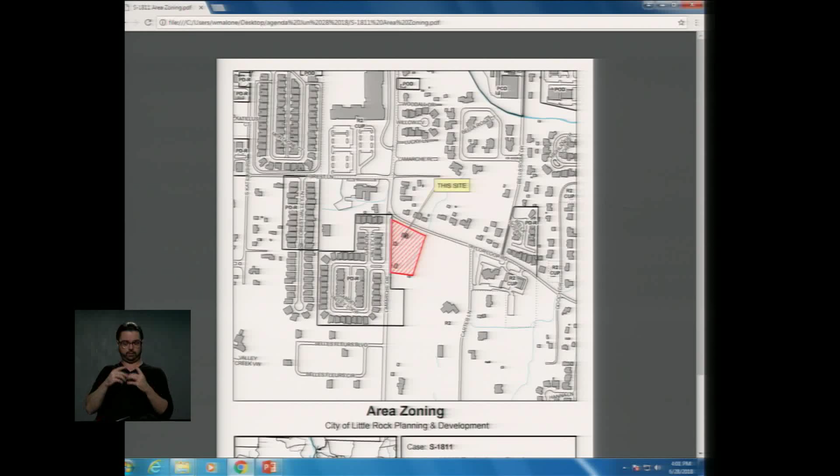Items for consent deferral. Item A, file number S-1811, LaMarche Village Preliminary Plat, located at 16307 Taylor Loop Road. Staff recommends deferral of this item to the August 9, 2018 hearing. The applicant and staff have been unable to resolve staff's concerns related to the driveway placement and the access and circulation on the site.

Item number C, file number Z-9320, Gramercy Park at Midtown, short form PDR, located at 6400 West Markham Street, or the northwest corner of West Markham and McKinley Streets. The applicant submitted a request dated June 4, 2018, requesting deferral of this item to the August 9, 2018 public hearing. Staff is supportive of the deferral request.

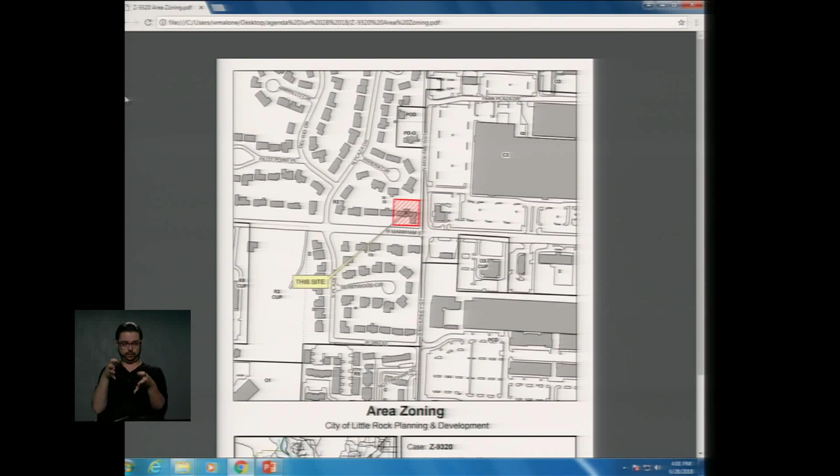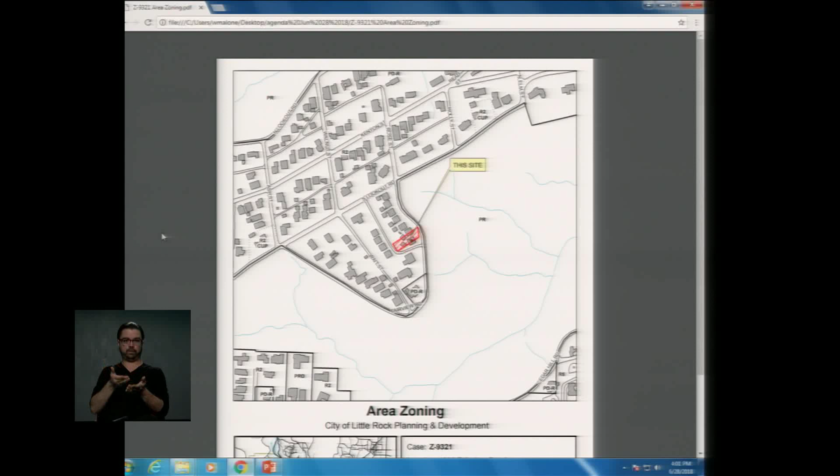Item number D, file number Z-9321, Calhoun short form PDR, located at 4208 Fairview Road. The applicant failed to provide proper notice to the property owners as required by the Planning Commission bylaws. Staff recommends deferral of this item to the August 9, 2018 public hearing.

Item number 1, file number S-1809-A, Breeding Addition Preliminary Final Plat, located at 7718 Henderson Road. Staff recommends this item be deferred to the August 9, 2018 Planning Commission hearing date to allow the applicant to secure approval from the Arkansas Department of Health that the existing septic system is in compliance with all health department requirements.

Item number 5, file number S-1819, 65th Street Center Subdivision Site Plan Review, located at 5303 West 65th Street. The applicant has not provided staff with the site plan to address their concerns related to access and circulation on the site once the fuel island and canopy are added. Staff recommends deferral of this item to the August 9, 2018 public hearing.

Item number 8, file number Z-1002-A, Sonny's Car Wash, short form PCD, located at 7706 Cantrell Road. The applicant failed to provide proper notice to the property owners as required by the Commission's bylaws. Staff recommends deferral of this item to the August 9, 2018 public hearing to allow the applicant to provide proper notice.

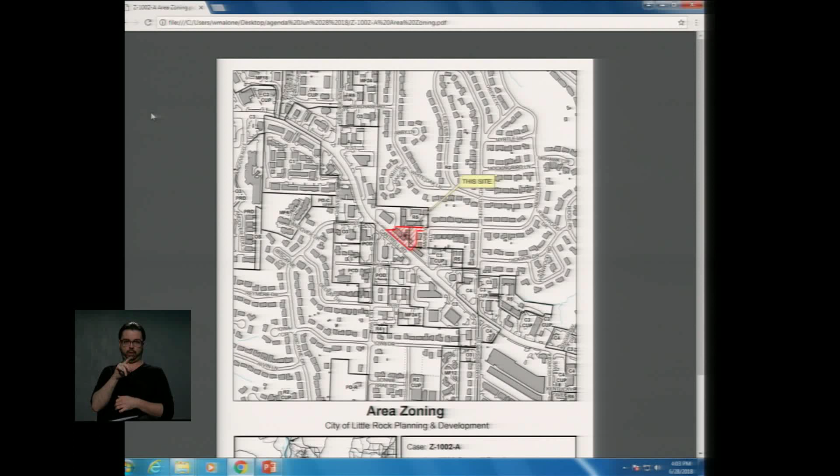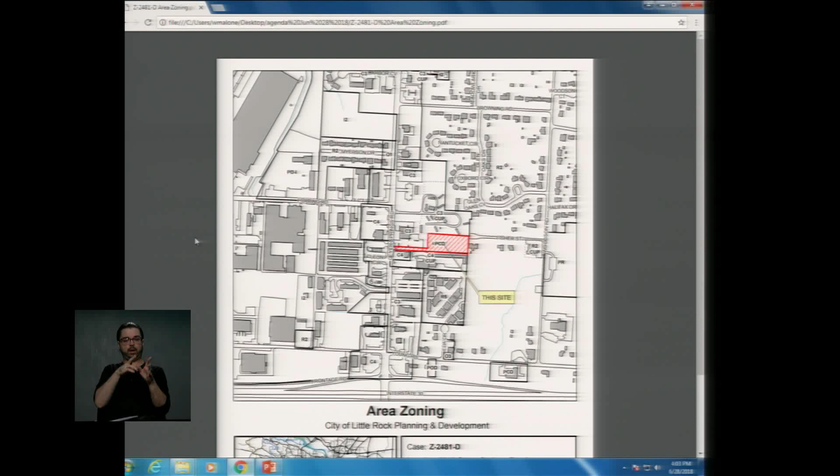Item number 9, file number Z-2481-D, Geyer Springs Business Center, short form PCD, located behind 7315 Geyer Springs Road. The applicant failed to respond to comments raised at the June 6, 2018 Subdivision Committee meeting. Staff recommends deferral of this item to the August 9, 2018 public hearing.

Item number 15, file number Z-8098-A, Palmer Revised Short Form PDR, located at 2919 through 2921 Lee Street and 1312 Kavanaugh Boulevard. The applicant submitted a request dated June 27, 2018, requesting deferral of this item to the August 9, 2018 public hearing. The applicant states additional time is needed to review staff's recommendation and potentially meet with the neighbors. The deferral request will require a waiver of the Commission's bylaws with regard to the late deferral request. Staff is supportive of the deferral request.

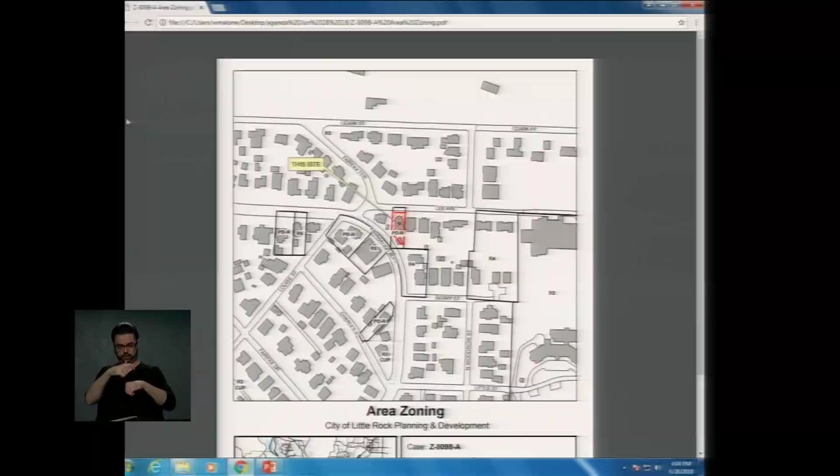Item number 23, file number A-332, Kanis Road Deltic Potlatch Annexation. Staff needs additional time to review and consider this request. Staff recommends deferral of this item to the July 12, 2018 public hearing.

Items for consent approval. Item 2, file number S-1816, Valerie Place Subdivision Preliminary Plat, located at 14,000 to 14,617 Kanis Road. Staff recommends approval of the request, subject to compliance with the comments and conditions as outlined in paragraphs D, E, and F of the agenda staff report. Staff recommends approval of the following variance requests.

A variance from section 31-256 and 36-254 to allow the front building setback to be reduced to 20 feet, and a variance from section 31-232 to allow the creation of lots with a lot width less than the 60-foot typical required per the R2 single-family zoning district, to allow 5-foot side yard setbacks on all lots within the subdivision, and to allow lots 16, 29, 33, 36, 45, and 52 to be developed with a lot area less than 7,000 square feet. Staff recommends approval of the variance request from the land alteration ordinance to allow grading of the lots with the installation of infrastructure and streets for the subdivision.

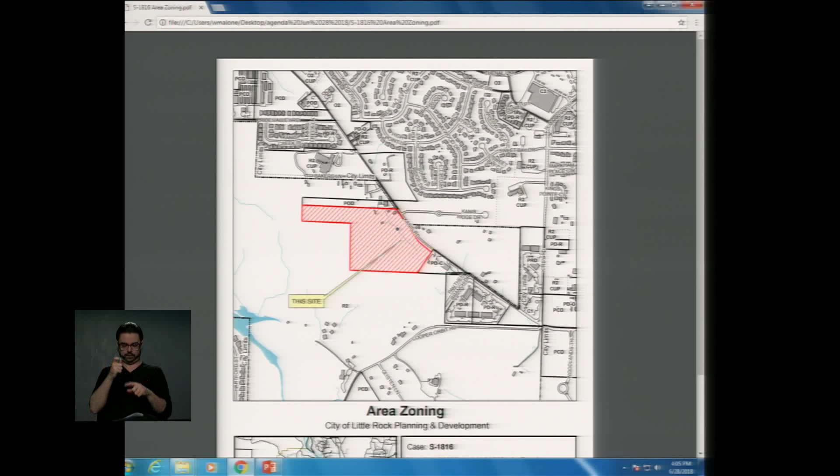Item number 3, file number S-1817, Herndon, Lot 1, preliminary final plat, located at 9201 Herndon Road. Staff recommends approval of the request, subject to compliance with the comments and conditions as outlined in paragraphs D, E, and F of the agenda staff report.

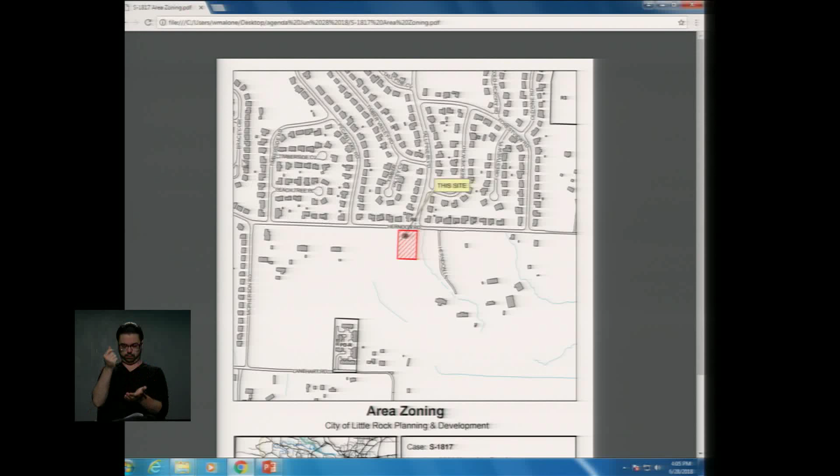Item number 6, file number S-1820, Lumber 1, subdivision site plan review, located at 11610 Vimy Ridge Road. Staff recommends approval of the request, subject to compliance with the comments and conditions as outlined in paragraphs D, E, and F of the agenda staff report.

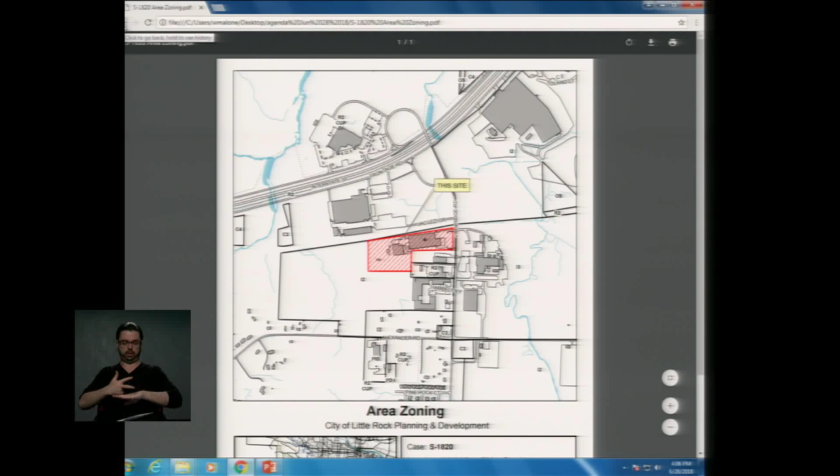Staff recommends approval of the waiver request of the screening of the outdoor storage areas along the northern, southern, and western perimeters. Staff recommends the parking lot be redesigned and concrete removed to allow for the parking to be located outside the right-of-way and the sidewalk to be located away from the back of the curb.

Item number 7, file number Z-4470-K, lots 3 and 4, Chenal Park Center, zoning site plan review, located at 15112 and 15104 Chenal Parkway. The applicant has agreed to limit the stacking of the easternmost drive-through on lot 4 to 6 cars and to the channelization of the southeast driveway and entrance. Staff is now in support of the request.

Staff recommends approval of the request, subject to compliance with the comments and conditions as outlined in paragraphs D, E, and F of the agenda staff report. Item number 10, file number

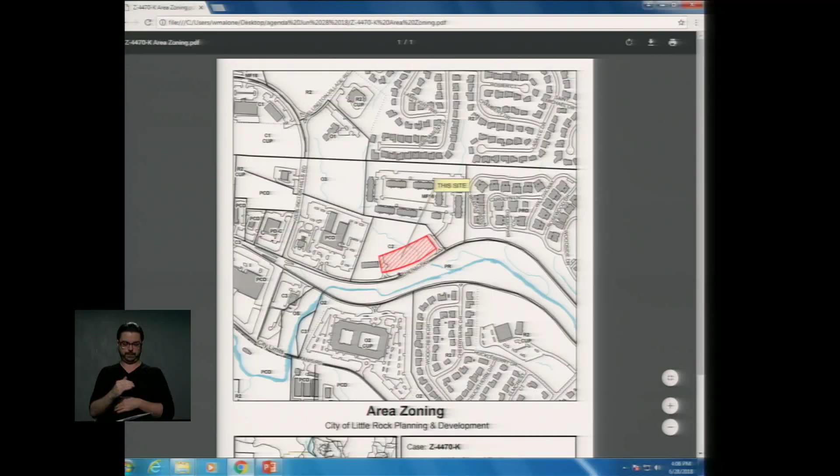Z-3371-CCC, lots 7 through 9, Colonel Glenn Tech Center, long form PCD, located on the northeast corner of South Bowman Road and Colonel Glenn Plaza Drive. The applicant has amended the request to include additional commitments with an adjacent property owner regarding building heights, site lighting, grading, and signage. This commitment will become a part of the approved site plan and the overall development plan.

Staff recommends approval of the request, subject to compliance with the comments and conditions as outlined in paragraphs D, E, and F of the agenda staff report. Staff recommends approval of the variance request from the land alteration ordinance to allow continued grading of the site. Staff recommends approval of the variance request from the Boundary Street and Subdivision Ordinance to allow the driveway located on Lot 9 nearer the property line than typical ordinance standard.

Staff recommends the street improvements adjacent to Lot 7 along South Bowman Road be completed with the development of Lot 8 or with the development of the second lot of this proposed PCD development.

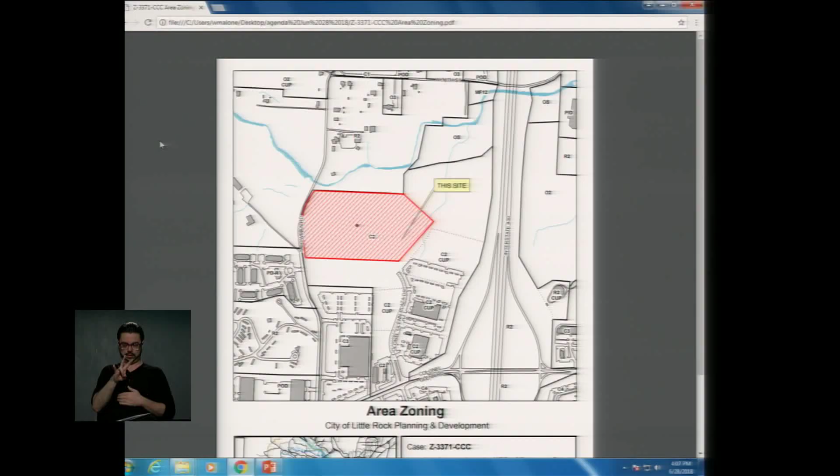Item number 11, file number Z-3371-DDD, Lumber 1, long form PCD, located at 10800 Colonel Glenn Road. The applicant has removed from the request the allowance of the drive along Colonel Glenn Road located between lots 3 and 4. Based on this revision, staff is now in support of the request.

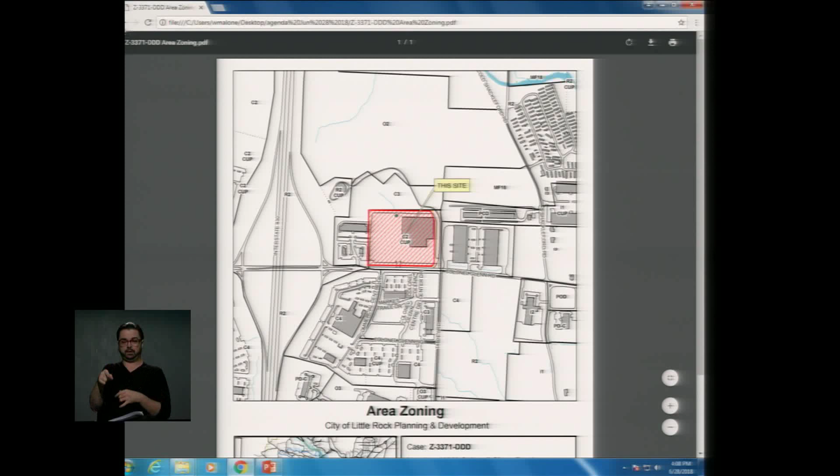Staff recommends approval of the request, subject to compliance with the comments and conditions as outlined in paragraphs D, E, and F of the agenda staff report. Staff recommends the drive aisles be reduced on all the lots to allow for additional street buffering area along Colonel Glenn Road. The existing parking lot curb is to be maintained, allowing the street buffer to be maintained as currently exists. Item number 12, file number

Z-4336-TT, Metropolitan Housing Authority, Powell Towers, short form POD, located at 1010 Wolf Street. Staff recommends approval of the request, subject to compliance with the comments and conditions as outlined in paragraphs D, E, and F of the agenda staff report.

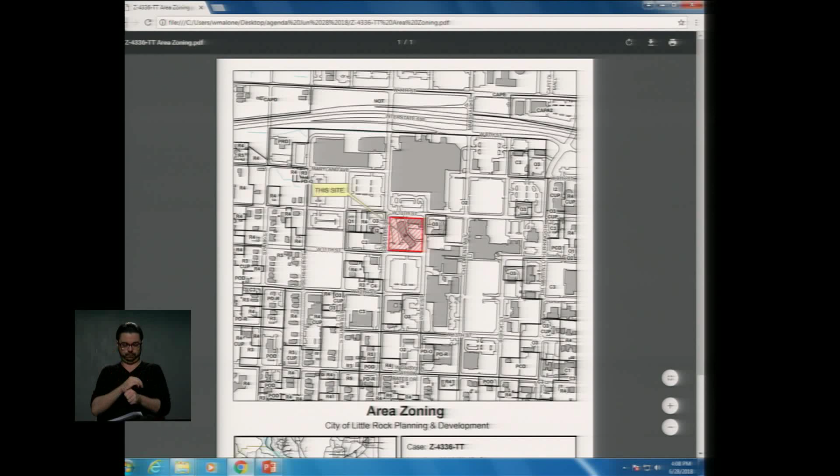Item number 13, file number Z-4946-A, Showroom Ready, short form PID, located at 10118 Colonel Glenn Road. Staff recommends approval of the request, subject to compliance with the following conditions.

Compliance with the comments and conditions as outlined in paragraphs D, E, and F of the agenda staff report. There is to be no outside storage of parts, equipment, or materials. All work must take place within the enclosed building. No inoperable vehicles are to remain on the site for longer than 7 days, and the use is limited to this business and the use as described in the applicant's proposal in paragraph A and the analysis in paragraph I.

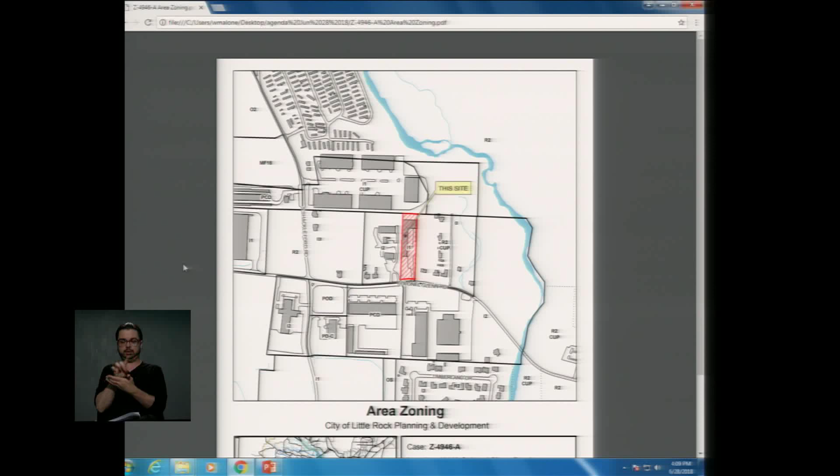Item number 14, file number Z-7899-A, Brett Short Form PCD, located at 10111 Chico Road. Staff recommends approval of the request, subject to compliance with the comments and conditions as outlined in paragraphs D, E, and F of the agenda staff report.

Item number 16, file number Z-8235-B, the Village at Bellaterra, long form PCD and PDR, located on the northeast corner of Stagecoach Road and Alexander Road. The applicant has amended the request and is now proposing Bellaterra Lane, Bellaterra Cove, and Bellaterra Boulevard within the residential portion of the development as private streets. Staff is now supportive of the applicant's request. Staff recommends approval of the request, subject to compliance with the comments and conditions as outlined in paragraphs D, E, and F of the agenda staff report.

Staff recommends approval of the variance request from the land alteration ordinance to allow grading of the site with the development of the first phase. And staff recommends approval of the applicant's request for a deferral of the boundary street improvements for the proposed Crystal Valley lateral extension located along the western boundary of the proposed development.

Item number 20, file number Z-3117-E, 7415 Colonel Glenn Road, revised short form PCD, located at 7415 Colonel Glenn Road. Staff recommends approval of the request, subject to compliance with the comments and conditions as outlined in paragraphs D, E, and F of the agenda staff report.

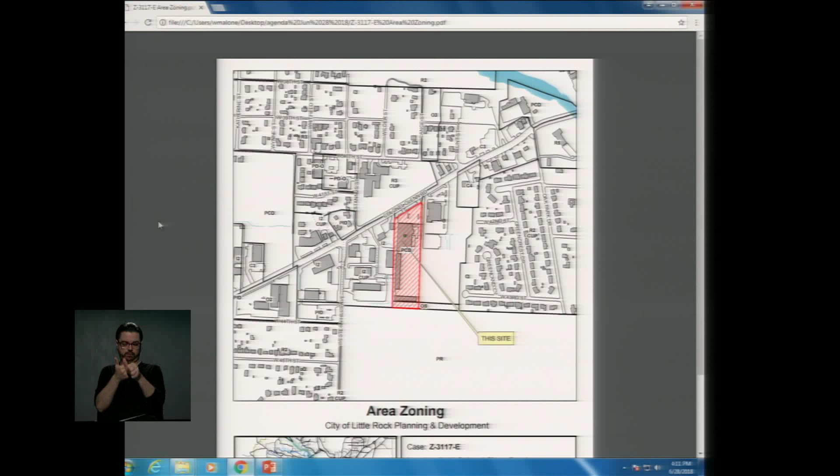Item number 21, file number Z-5365-F, Geyer Springs First Baptist Church, short form PDO, located at 12400 I-30. Staff recommends approval of the request, subject to compliance with the comments and conditions as outlined in paragraphs D, E, and F of the agenda staff report.

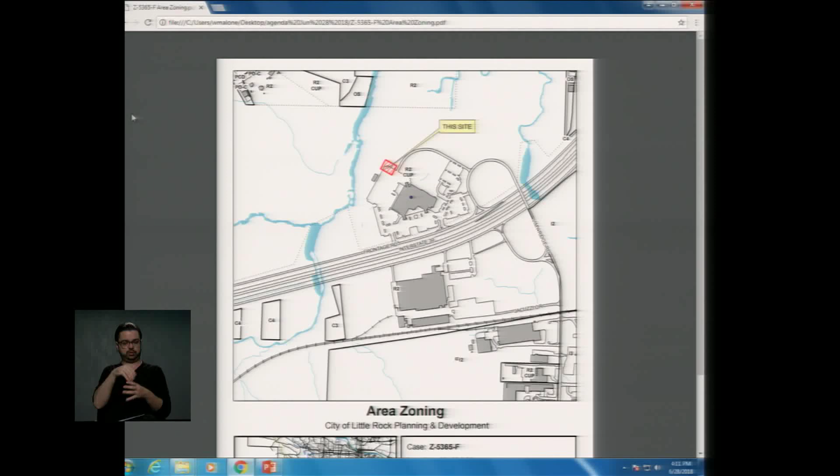And item number 22, file number Z-8292-B, the House of Vision, short form POD revocation, located at 1921 Wright Avenue. Staff recommends the current POD zoning classification be revoked and the previously held R4 two-family district zoning be restored. And that concludes the consent agenda.

Thank you, Ms. James. Before we get on with the motion, I just am about to get a card on item number 16 on Bellaterra. Is that correct? Someone has questions about it. Just walked in. So we'll pull 16 off.

Does anyone have to recuse themselves for any of the items that are on the consent agenda before we go on with motions? Mr. Chairman, I'd have to recuse on consent approval, but I have 3 items on there. Thank you, Commissioner Leahy.

Do I hear a motion on the bylaw waiver? Mr. Chairman, there is a bylaw waiver needed on item number 15, and I move that that be granted. Thank you, I'll second. We have a motion to waive the bylaws on item 15 for deferral to August the 9th. Do I hear a second on it? So those approve of the waiver and the deferral, raise your hand. Those who opposed? Okay, now for the consent agenda.

Item number B, file number Z-9284, Sticks Bar and Grill, which is actually now an event center, short form PCD, located at 3910 Asher Avenue. This item was deferred from the Commission's April 5th, 2018 public hearing to allow the applicant additional time to secure a parking agreement with the church, which owns a large portion of the paved area in front of the building. The item was deferred from the Commission's May 17th public hearing because the applicant was not present to represent their case. Since the staff write-up, the applicant has provided staff with the parking agreement with the church.

Staff continues to have concerns with both the lack of parking to serve the site and the placement of an event center at this location. There are single-family homes located immediately to the north of the site, and a portion of the applicant's proposed parking is located adjacent to the homes. Staff feels the site should be redeveloped to some type of retail use, which would not require the amount of parking required for an event center and would have hours with less impact on the nearby adjacent homes. Staff recommends denial of the request.

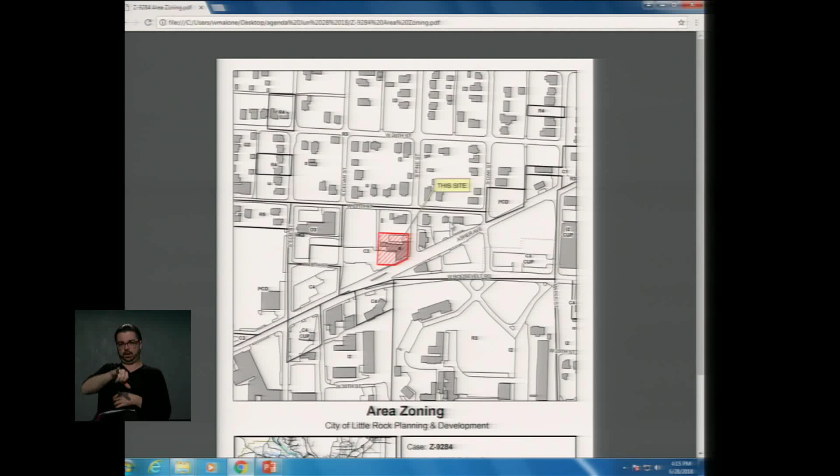Okay, is the applicant here? Yes. Would you like to speak to staff's concerns, anything about your application? Yes, sir.

What I was planning on doing about the parking against the residence is providing a private fence around that resident area, around the parking, so the parking or anything else wouldn't bother the resident behind the building. I hadn't had any complaints from the guy that stays directly behind the building.

In fact, he watches the building while I'm not there anyway. It's going to be kid friendly. I'm planning on hiring the Little Rock Police Department to patrol the area if I have a night event, and hire an armed security guard, private security, so they can also patrol during a day event and a night event.

I want the event center for little private birthday parties, or what I'm looking for is receptions, wedding receptions, stuff like that, and that's basically it. It's not going to be nothing else in there.

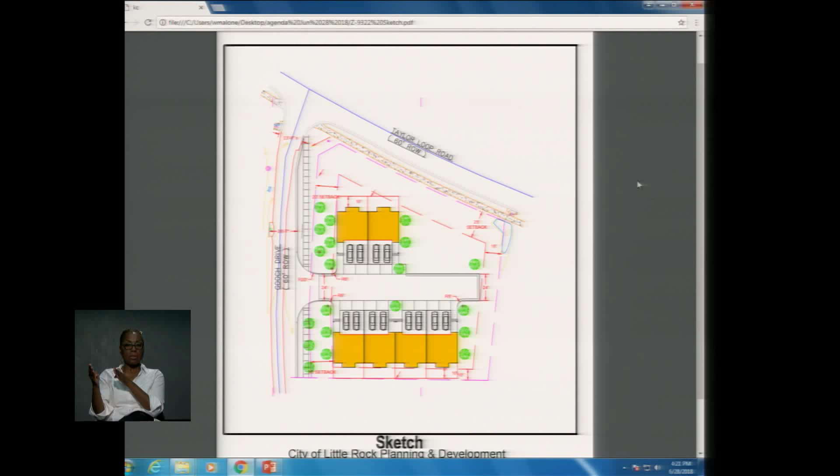The plan indicates a 10-foot building setback along the southern perimeter of the site, a 20-foot building setback along Gooch Drive, and a minimum setback along Taylor Loop of 25 feet. The maximum building setback along the eastern perimeter is 15 feet. The applicant has indicated there will not be a fence placed on the perimeter due to the flooding hazard of the site.

The applicant notes fences around the patio areas will be placed for each unit. Areas along the south property line will be 6 feet high. For the length of the 4 units, a 6-foot wood fence will also be placed around the patio areas of the homes along the northern portion of the site. The development is proposed in a single phase.

Public Works staff has worked with the applicant on the site drainage. The subject property is .9 acres in size, with the upstream drainage basin consisting of 422 acres. The applicant proposes to exceed the drainage requirements found in the Little Rock Stormwater Management and Drainage Manual, providing stormwater detention for a 25-year storm event, even though detention is not required since the property being developed contains less than 1 acre. The applicant also proposes to provide more stormwater storage volume on the site than the pre-development condition.

Appropriate landscaping in areas proposed to store stormwater will be placed, which will be tolerant of the temporary ponding conditions. Staff is supportive of the applicant's request.

The applicant is seeking approval of the rezoning to allow the development of 6 townhouses with a density of 6.66 units per acre, just over the density typically allowed per the future land use designation of residential low. Staff feels the development of the site as proposed is appropriate, and staff recommends approval of the request, subject to compliance with the comments and conditions outlined in paragraphs D, E, and F of the agenda staff report.

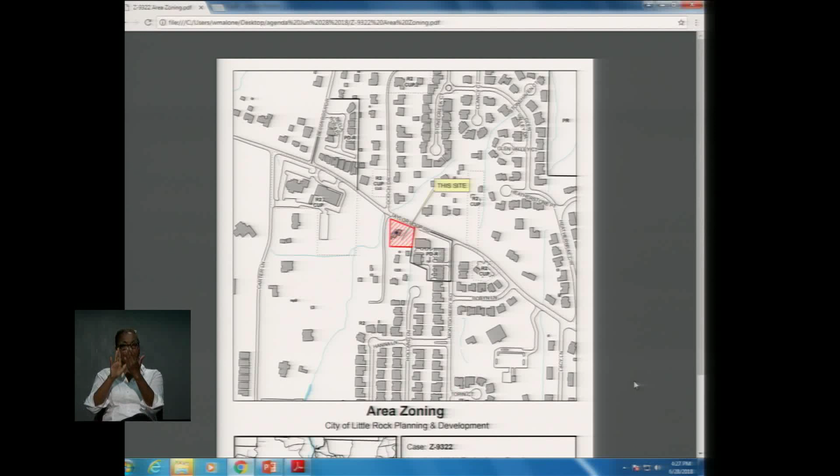I've had to buy flood insurance. I don't live in a floodplain, says my deed, but I have to buy flood insurance to protect my house. I'll be 79 next year. I don't want to have to buy flood insurance. I live in an area that was not to be that. So I'm asking you to consider what I have said to you, and what I have been faced with ever since Madison Valley. Thank you very much.

Thank you, Mrs. Nettles. Drainage seems to be coming up as an issue for developments out here. I think Public Works speaks to that. Anyone from Public Works want to speak to that? I'll let the applicant address that as well, but there's a general issue beyond this application too.

Well, that's a very broad topic, and we're talking about a lot of different things. Of course, tonight we're talking about just the 1 acre lot there.

The Nettles property would be the second house over from Gooch on the other side of the street. There is a very large drain that comes in and crosses right very close to the front yard of that house, including a little shop building further down on the creek. She has called us before, and she had water in her shop building.

Across the street, Madison Valley's some years old now. Maybe a couple of you remember when that one went in. It would be the subdivision to the south along Madison Road, and there is detention provided there. And it did meet the standard for the time.

Certainly, though, in an area that's prone to flooding, you get some large events. And I'd remind you that even in the best of designs, they're to have a design storm, and when that design storm's exceeded, the water's still coming. It doesn't guarantee under every event it'll never flood, but certainly it was built to a standard for the 25-year pre-development and post-development storms. And we do try to pay very close attention to that.

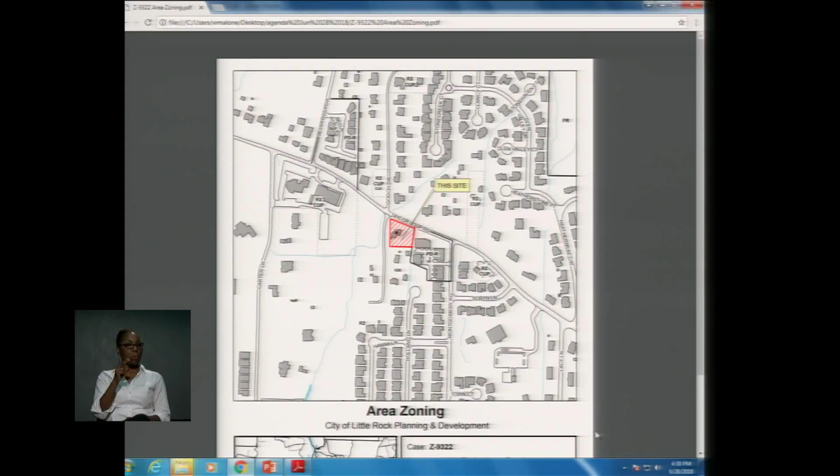Mr. Hood, will this, in your opinion, will this development make the flooding, make the drainage worse, or have no real impact? We spent a long time on that little lot there. It's 0.9 acres. It's got 422 acres of drainage above it. And that's no small amount of water that comes down Gooch Road right there. That's a pretty good sized little creek, and it's got a big box culvert under Taylor Loop.

I think it's best to let the applicant describe what he has done and what we've reviewed, as was presented there in the introduction. He's actually exempt from having to do any kind of stormwater detention because of the size of the lot being so small. But he has worked well with us.

Okay. Thank you. Sure, come on up. How you doing? I'm Jess Griffin, civil engineer.

Basically what we did is we first provided detention to slow any water down coming from any additional impervious area that we've added to the site, because there were 2 or 3 buildings there, and we've added some more pavement and buildings, but we've added a detention area to slow the water down for a 25-year storm event.

And then we've also tried to be very mindful of the neighbors around and her property downstream. Prior to this development there had been some flooding, and we've had pictures and evidence of that flooding. Based on that pictures and historical evidence, we determined the elevation of what that flood was and the level that the flood got to. And from the existing contours to the flood elevation of the past event, we determined what the existing storage was.

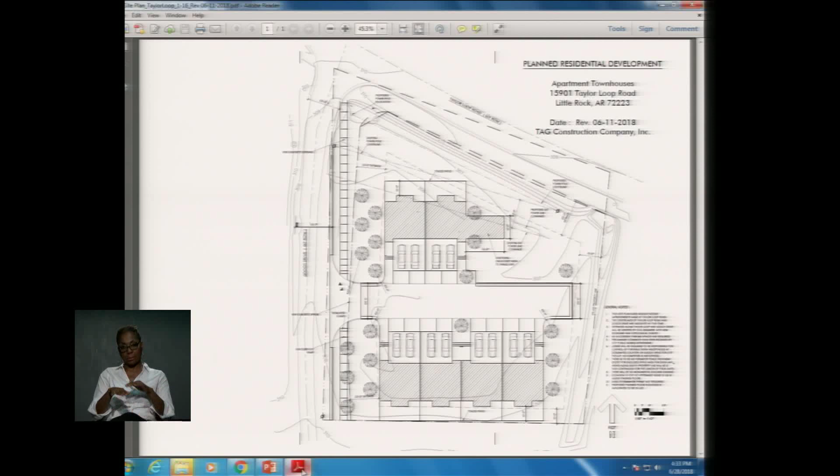And so that's basically it, do y'all have any questions? Commissioners, any questions of the applicant or comments? Commissioner Leahy.

Yes, go ahead. I feel for all these people out there, and it's a problem. I've been in this game since back in the 70s, but that doesn't make any difference. But I don't think there's some kind of a solution. There's got to be a solution for these people, but especially the neighbors. They didn't ask for this, they didn't want anything, and nobody is taking anything to protect them that's doing any good anyway. 25 years, in my opinion, is not near enough for the flood protection, flood zone out there, flood business. And I'm going to be opposed to it just on that reason. I hate it for the developer, but I also feel for the people downstream when they've been there all the time and they don't have anything they can do about it. That's all.

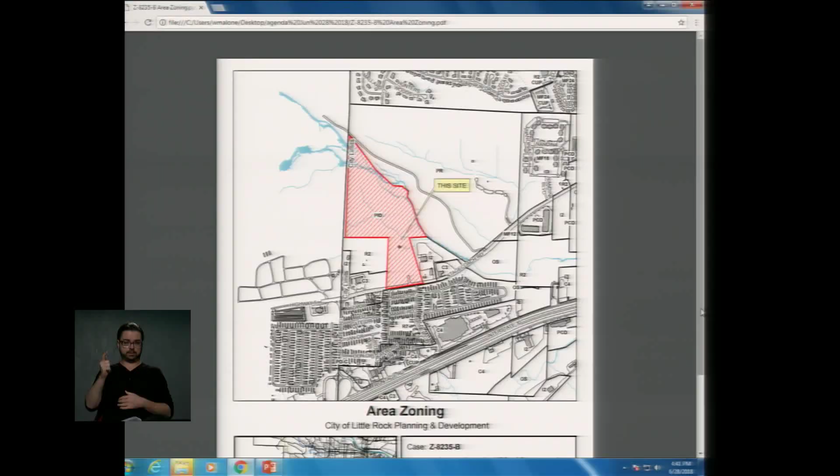Okay, those approve of item number 16 with all staff recommendations. I hear a motion. Oh yeah, I'm sorry. I move that we approve. I move for the approval of item 16 with all staff recommendation conditions therein. Do you hear a second? I'll second. Okay, the motion has been made and seconded. Those approve of the application, raise your hand. Thank you, Commissioner Leahy. Those opposed? Item passes 9.

All right, thank you with that. Item number 17. Okay, item number 17, Hillcrest Little Bakery, revised short form PCD, file number Z-8684-A, located at 201 and 203 North Van Buren Street.

Ordinance number 2475, adopted by the Board of Directors on September 20th, 2011, rezoned the site from R3 to PCD to recognize an existing use and to add a mobile canteen as an allowable use for the site. The site contained a beauty shop, which operated at 201 North Van Buren. The building was a 2-story building with the residence on top of the beauty salon. The site also contained a 3-bedroom dwelling located at 203 North Van Buren. The request was to allow the use of the single-family residence with general and professional office uses, or to allow it as a single-family residence.

The current request is to amend the previously approved PCD to add a bakery as an allowable use. The applicant is proposing to rehabilitate both buildings and restore them to the original lap siding and historic look, and open a bakery restaurant utilizing the main structure. The smaller structure will be used for storage on the lower level and an efficiency apartment upstairs. The bakery will offer limited seating inside as to not encourage prolonged parking, but to be able to offer a limited number of clients the ability to eat on premise. The site plan indicates the placement of 10 parking spaces to serve the site. The existing gravel parking area will be paved, and the driveway into the backyard is proposed for additional paved parking.

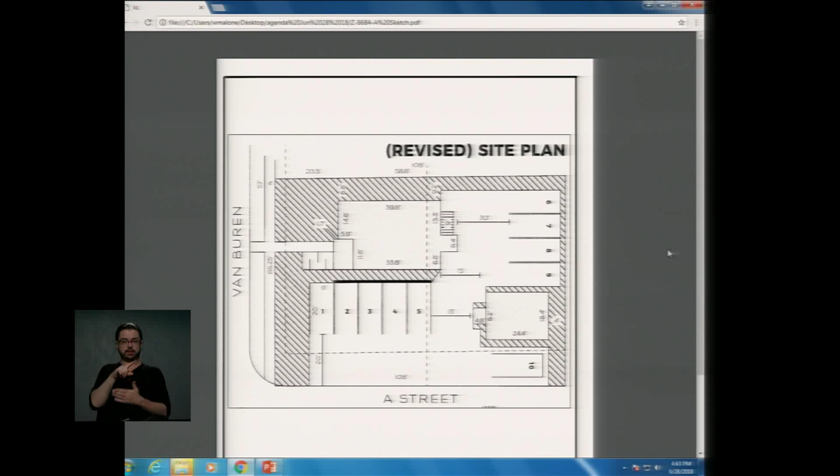The building proposed for the restaurant contains 1,000 square feet. Parking for a restaurant is typically based on one parking space per 100 gross square feet of floor area, which would result in the need for 10 parking spaces. The site plan indicates the placement of a 20-foot drive along A Street and parking stalls 20 feet in depth. The plan does not include placing curb, gutter, or sidewalk along A Street. The applicant notes this section of A only serves this lot and a single-family residence to the east. Along the south side of A Street, improvements were installed with the bank construction at the intersection of A and Jackson. The sidewalk was put in place, which currently dead ends into a retaining wall.

The property immediately south of the site is developed as an office use. There is no sidewalk in place along A Street adjacent to the office development. The applicant is requesting a waiver of the radial right-of-way dedication and a waiver of the right-of-way dedication for A Street. The right-of-way dedication will be provided for Van Buren. The request also includes a waiver of the street buffer requirement for the landscape ordinance requirements for the newly paved area along A Street.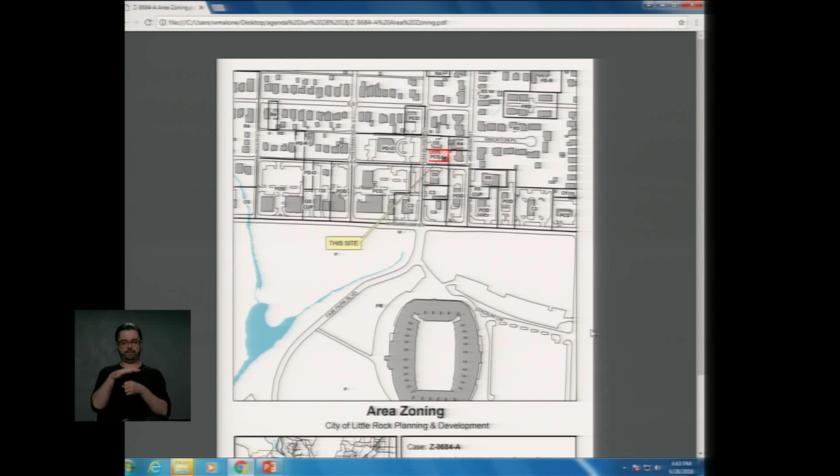The area along A Street would require the placement of a street buffer of 6 feet 9 inches, which the applicant has not indicated on the plan. A new paved area is proposed within the rear yard area of the site.

The plan indicates a placement of 4 parking spaces. The landscape and buffer ordinance would typically require a 6 foot 9 inch landscape strip adjacent to the paved area. The plan indicates a landscape strip which appears to be less than 4 feet. Staff is not in support of the applicant's request.

Based on the applicant's redevelopment plan, the site does not provide the required right-of-way dedications, landscaping, and proper buffering. Staff feels the development as proposed is too intense for the site, and staff recommends denial.

Okay, thank you, staff. The applicant is here. Scott, please come up to the lectern and tell us a little bit about your application, but also speak to staff concerns regarding your site plan.

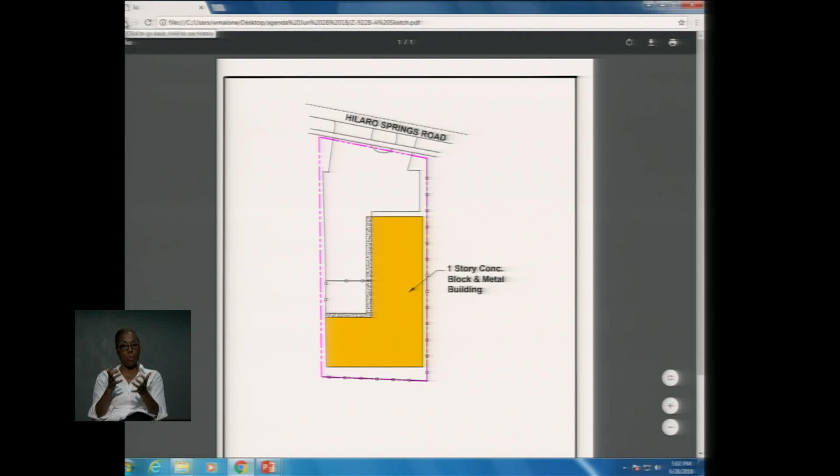Staff is not supportive of the applicant's request to allow the outdoor display as proposed. The applicant is seeking approval of C4 open display district uses on the property, which is located adjacent to residentially zoned and used property. The C4 open display district is intended to provide a location for a limited amount of merchandise, equipment, and materials being offered for retail sales that, because of the type of materials or transportation requirements, is suitable for display and storage outside the confines of an enclosed building. Such uses are not generally compatible with pedestrian-oriented commercial districts or shopping centers since they tend to obstruct and interfere with pedestrian movements. Appropriate locations for this district are typically along heavily traveled major arterials.

The staff does not support the request for the off-premise billboard at this location. Billboards are typically limited to C3, C4, I2, and I3 districts, and are typically placed on heavily traveled major arterials. Staff does not feel this is an appropriate location for an off-premise sign, and City Code establishes a cap on the number of billboard permits. The cap has been reached and there are no additional billboard permits allowed. To allow an additional permit would require a change in City Code. Staff recommends denial of the application.

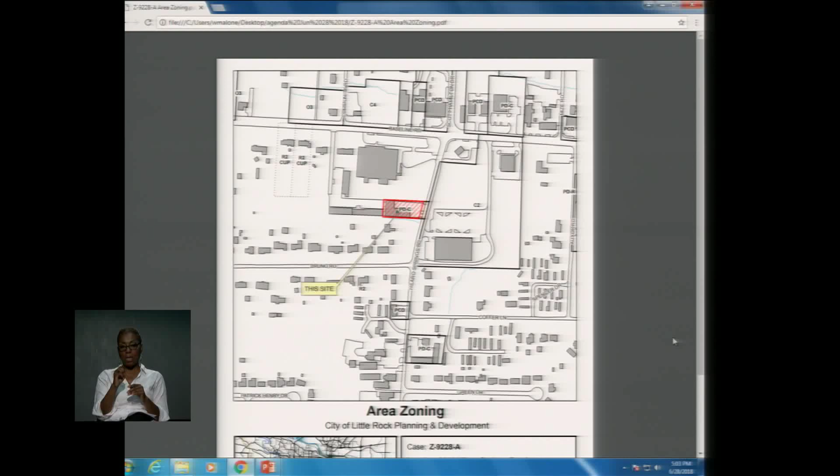Okay. Thank you, staff. The applicant's here. Would you please come to the lectern and state your name? There's no cards speaking against this, so you're welcome just to say a few words about your application and speak to staff concerns. And now, Ruth has a card.

Okay. Thank you. Okay. State your name and speak to the staff's concerns. I'm Rizwan Surani.

On this property, we are just asking to display our merchandise, like 4 or 5 ATVs. We have a business for ATV four-wheelers. And I'm not pushing about the billboard now. It's fine, if the city doesn't allow the billboard, it's okay. But I just request you to allow us to display these products. This is our products, the small kids' ATVs. It's just kids' toys. Pass that around. There you go. Thank you.

Okay. Thank you. We do have one card in favor. Stephen Mann, did you say you wanted to speak for this application? Okay. Yes.

Myself and Pam Bingham, Pam Bingham was the president of the Upper Baseline Group, we were out at one of the areas talking to somebody and saw that the new business had moved in, so we decided to go over and welcome them to the neighborhood. This is a very proactive business, they're for the community, very, very pleasant people to talk with. She and I thought it was going to be a great asset to the community because they're proactive about the community and concerned about it. So our vote was to get them in there and make them happy.

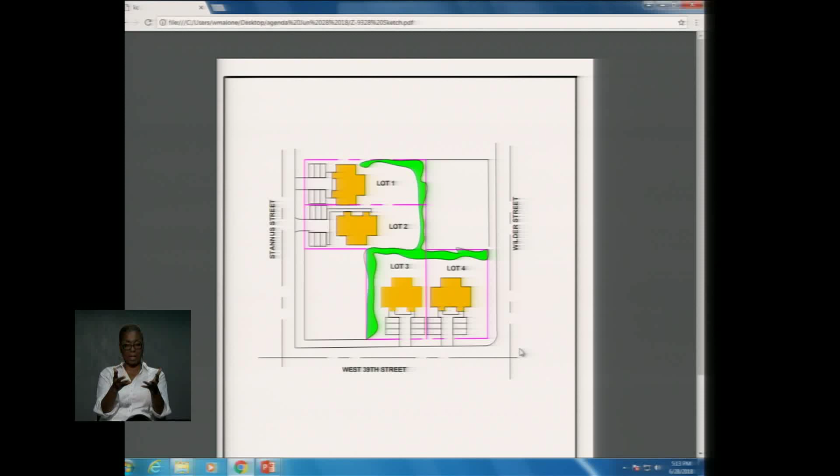Each lot is proposed with a single driveway and 6 parking spaces. Parking for multifamily is typically based on 1 space per unit; a duplex unit would typically require 2 parking spaces. A minimum setback of 35 feet from the street right-of-way is proposed, with a minimum 5-foot side yard setback on each lot. Lots along Stannus Street are located within a 9-foot 6-inch side yard setback from the side property line. Buildings on West 39th Street are indicated with a minimum side yard setback of 24 feet. The applicant has indicated right-of-way dedication per the master street plan will be provided, and is requesting a waiver of required street improvements to the abutting street.

The applicant states in his follow-up letter that he has developed several similar projects within close proximity to the site and has not been required to install the boundary street improvements, nor has he been required to seek a waiver of the requirements from the Planning Commission or the Board.

He states that within the City of Little Rock boundaries, the site is somewhat remote and the streets are not well traveled. Stannus and Wilder Streets are dead-end streets into Boyle Park, which is a positive enhancement to the quiet rural-like setting. In staff's opinion, since the project is a single lot proposed to be platted into 4 lots, the boundary street ordinance is indeed triggered and the improvements are required.

And Mr. Hood's going to come up and give you a little bit more on why we feel that this is important.

You've seen this applicant before. He's done several applications here. He's in my office a lot, I know that. This is a little bit different. It is a little bit different.

It's true what he says, but in this case he's bought himself an odd lot, and there's no other way to describe it - it's a big lot. Before, he was dealing with old existing platted lots, most of them in the Barrow Addition already on the ground. The code says for 1 and 2 family lots, you're exempt from boundary streets, don't need anything from public works. But this isn't quite the same. It's a duplex, but he's bought this big lot and he's going to cut it into 4 pieces. That makes it a subdivision. So once you start subdividing land, creating new lots to sell, then you're subject to all the boundary street requirements.

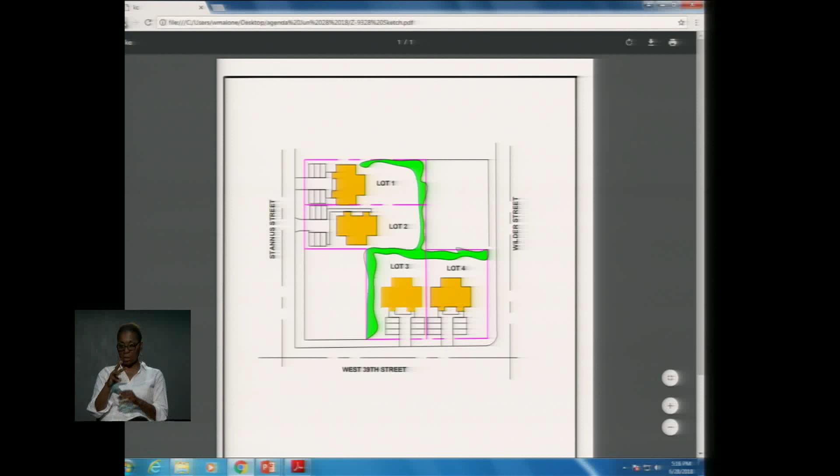Yes, we saw that. Thank you. Applicant, would you like to speak? Yes, I got something to show you this time. Okay, just go ahead and pass them around, please.

Thank you. My name's Stanley Phillips, and I've been working in the John Barrow area. And if you notice, nothing's moving over there. There are about 5 or 6 resident houses there. It's very, very, very low traffic. Only thing over in there now is deer and maybe a bear up in that big woods.

No, I did not - when I first looked at the land, because those that know me know I don't like fights, I'd rather not fight. It was platted as 9 lots, but it turns out the owners of the property, old people, never filed it. So it turned out to be, in essence, one big lot that didn't get platted. But that doesn't make sense. My thing is, let it make sense. If something's a rule or it's on the books, let it make sense.

The parking that I put in - my people don't back out in the street. There's plenty of room to turn out. I put in way more parking than necessary. Y'all know Ms. Hyman - she bleeds John Barrow. For her and the association to be in agreement, we went out to the site, we've looked at it, we've been there many times. I don't know how many times the city's been out there, but ain't nothing moving out there.